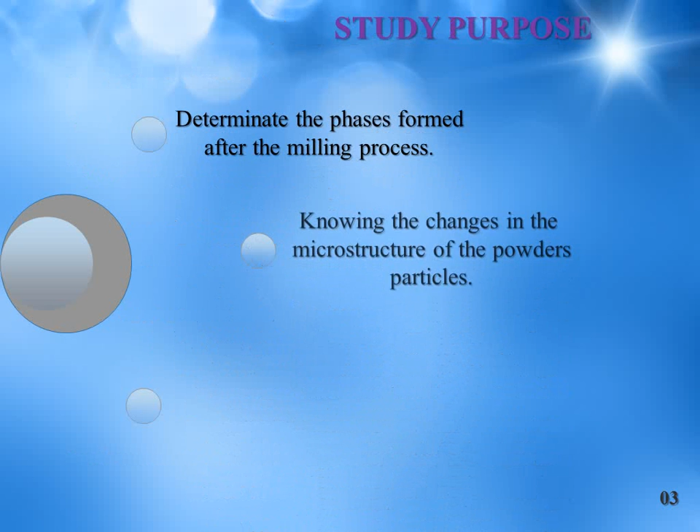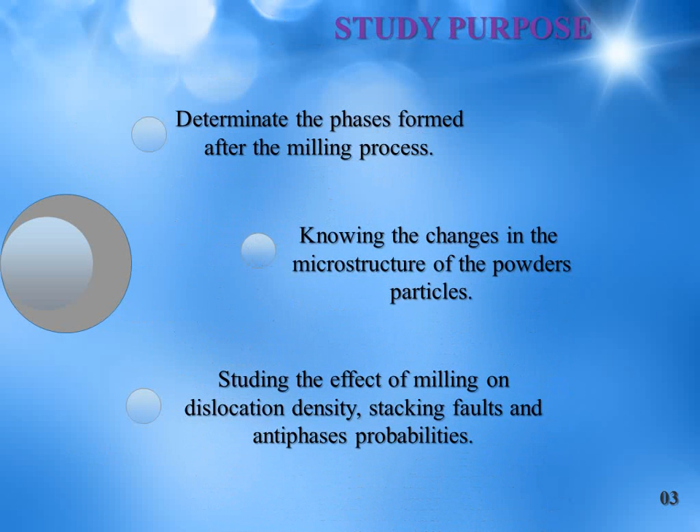The purpose of this study is determining the phases formed after the milling process, knowing the changes in the microstructure of powder particles, and studying the effect of milling on dislocation density, stacking faults, and anti-phase probabilities.

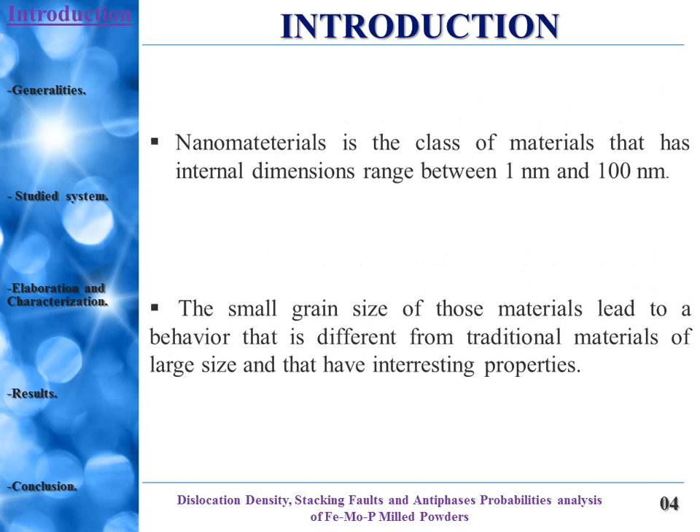Introduction. Nanomaterials are a class of materials that have internal dimensions ranging between 1 nanometer and 100 nanometers. The small grain size of these materials leads to a behavior different from traditional materials of large size, and they have interesting properties.

Classification of nanomaterials. Zero-dimensional nanostructures: this category includes all materials with a dimension of 100 nanometers in diameter.

Two-dimensional nanostructures: in this category, a scale of 2 dimensions of 100 nanometers is required. Nanotubes and nanowires, as well as nanofilms, are important models for this class of materials.

Three-dimensional nanomaterials present particles such as nanoparticles, metal powder, and ultrafine ceramic materials, called three-dimensional because their dimensions on all 3 axes are less than 100 nanometers.

Terms of nanomaterials: quantum dots, fullerene, nanoballs, nanoparticles, nanotubes, nanofibers, nanowires, nanocomposites.

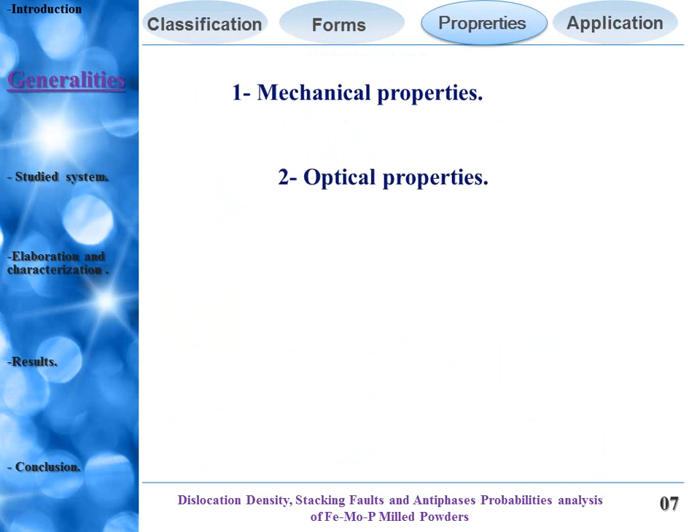Properties of nanomaterials: mechanical properties, optical properties, magnetic properties, electrical properties. Applications of nanomaterials: energy, transport, army, medicine, electronics, water treatment, space.

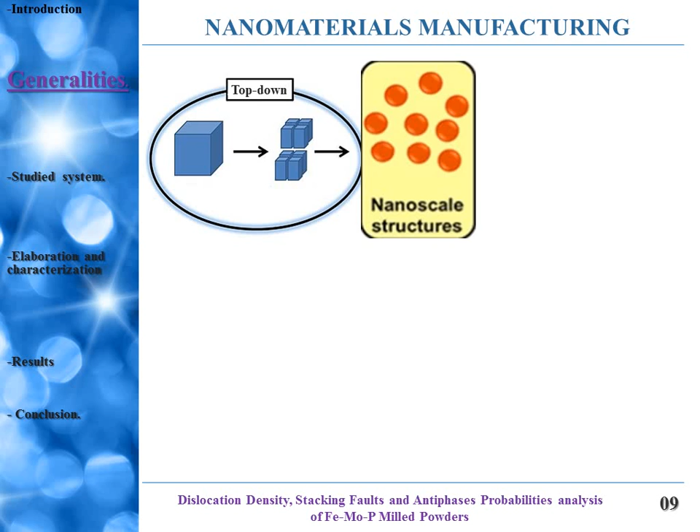Nanomaterial manufacturing. Top-down: in this way we use bulk materials in their natural state, beginning with the materials and reducing them to the nanoscale, such as reducing bulk materials to nanowires.

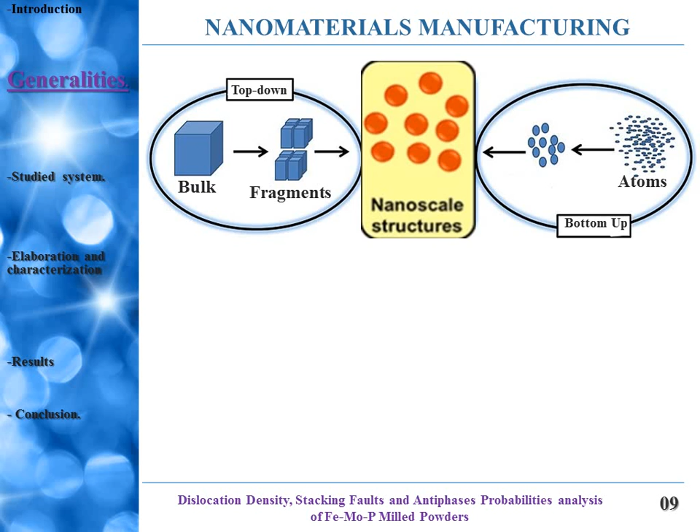Bottom-up: in this way we start from the atoms, which are then separated and assembled to reach the nanotechnology scale.

The methods used in top-down include milling, etching, laser contact method, and sputtering. The methods used in bottom-up include sol-gel, aerosol, and chemical vapor deposition.

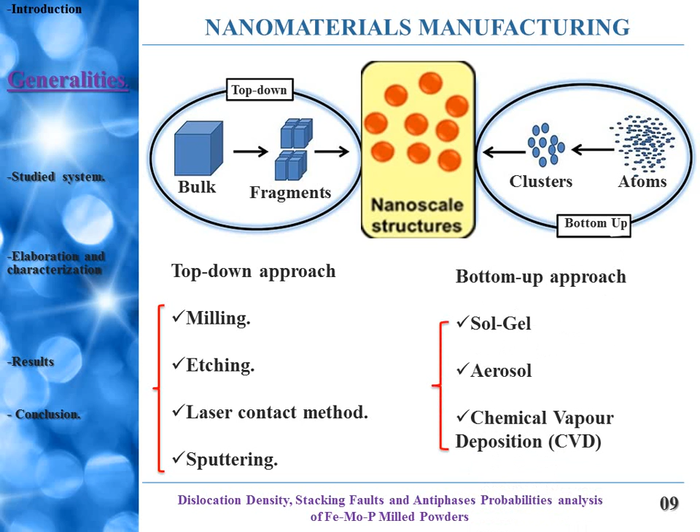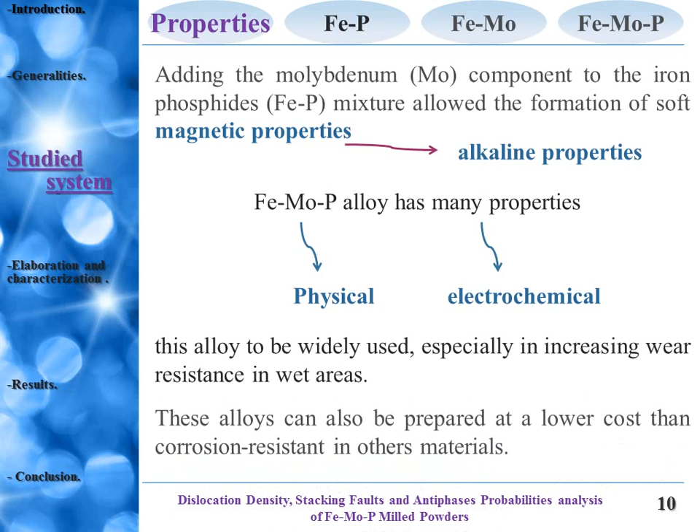Properties: adding the molybdenum component to the iron phosphide mixture allows the formation of soft magnetic properties and improves alkaline properties. Iron molybdenum phosphide alloy has many properties, physical and electrochemical. This alloy is widely used, especially for increasing wear resistance in wet areas, and can be prepared at lower cost than other corrosion-resistant materials.

Iron phosphorus binary complex system consists of 4 defined compounds: Fe3P, Fe2P, FeP, FeP4, and different transformations like eutectic and allotropic ones.

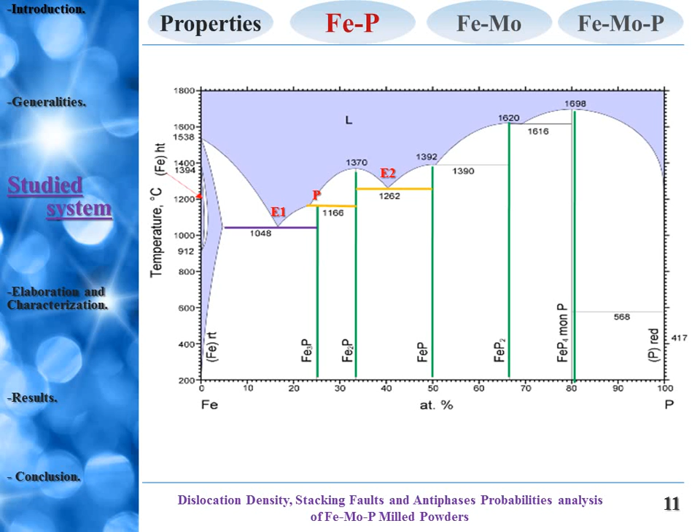Iron phosphorus binary complex system, where several transformations take place, as shown in this diagram: allotropic, eutectic, monotectoid, and peritectic transformations.

Thus, the iron molybdenum phosphor ternary system equilibrium diagram is complex too. It consists of 3 defined compounds formed by fusion: MoP, Fe3P, Fe2P, and there are 2 ferrites.

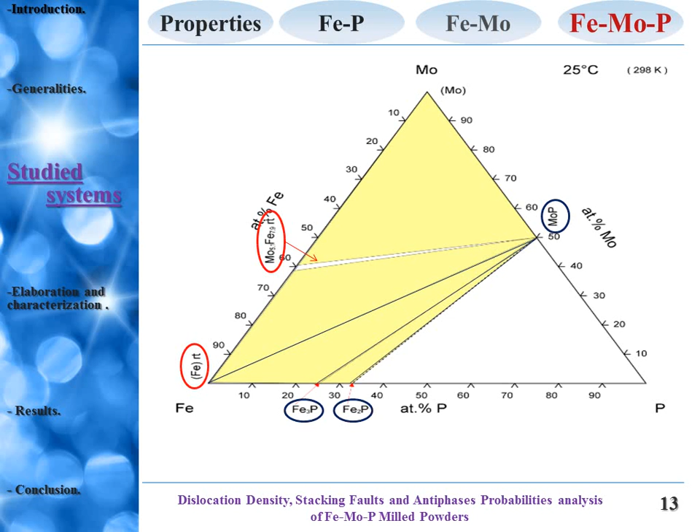Iron molybdenum phosphor samples were prepared by mixing small amounts of iron, phosphorus, and molybdenum powders. The samples were prepared inside a glove box in order to avoid the effects of oxygen contamination of the powders, under an argon atmosphere.

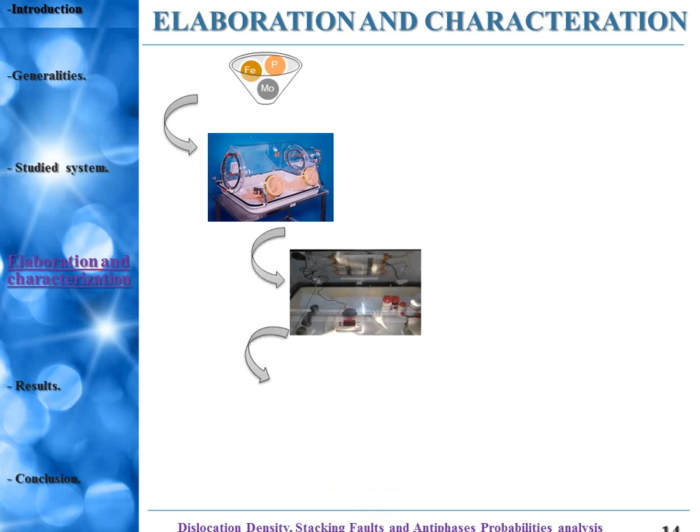Then the vials were placed inside a Retsch PM400 planetary mill for a high energy mechanical milling process. The milling speed reaches 350 rpm, stopping every hour for half an hour to avoid overheating inside the vials.

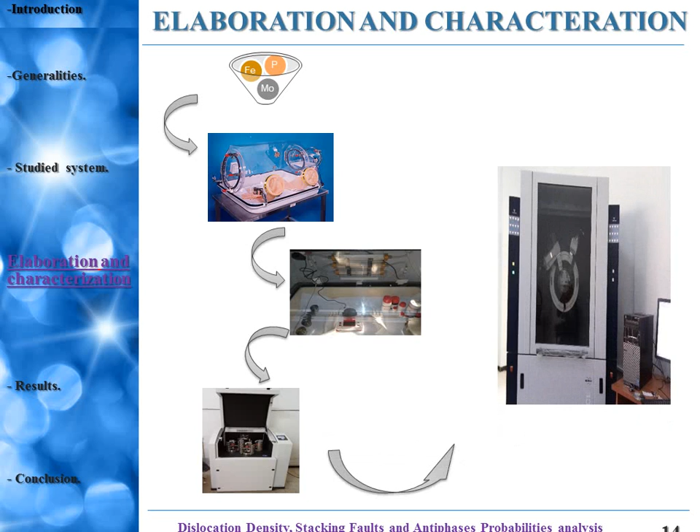To determine the new properties of the powders after milling, we used X-ray diffraction with a Bruker D8 type X-ray diffractometer, and simulation with a program based on the Rietveld theory.

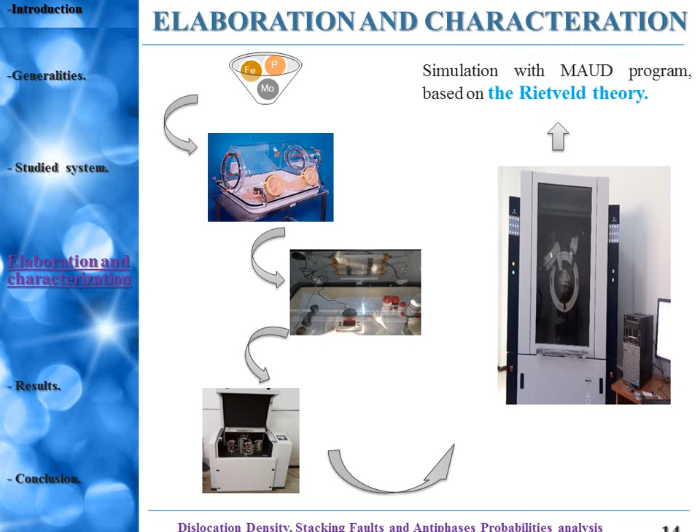The Rietveld theory is a theoretical method to analyze X-ray diffractograms, adjusting the profile of the experimental diffraction diagram using instrument parameters, structural and microstructural parameters. The Rietveld program minimizes, by an algorithm based on the least squares method, a function called the residue, with Yci equal to...

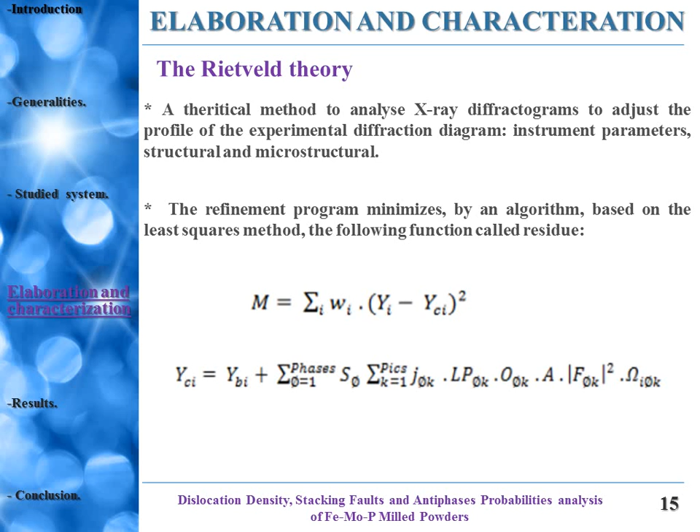We now turn to the results. Before the milling process, we note the existence of 2 different phases, which are the alpha solid solution and the molybdenum element, and the disappearance of the phosphorus element.

After an hour of mechanical milling, we observed the disappearance of the molybdenum compound and the emergence of the iron molybdenum phase, with the continued appearance of the alpha iron phosphorus solid solution. After 2 hours of mechanical milling, no new phases had formed, only the iron molybdenum phase and the solid solution.

After 3 hours of continuous mechanical milling of the mixture, no new phases appeared, but the arrangement differed from the 1 hour and 2 hour grindings.

The stable phases obtained from 1 to 3 hours of milling are iron molybdenum and the iron phosphorus solid solution, with different structural and microstructural parameters.

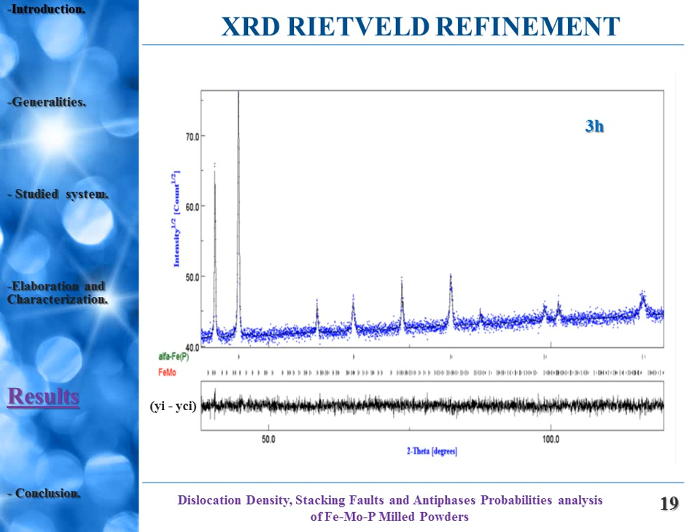After 1 hour of mechanical grinding, it was observed that the most intense peak of the solid solution descends a little, then rises again after 2 and 3 hours of grinding.

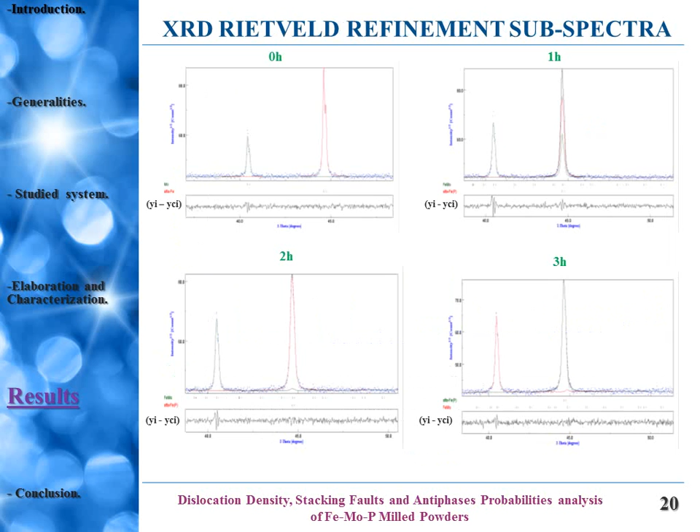After 3 hours of milling, the grain size decreases for the solid solution and remains nearly stable for the iron molybdenum phase.

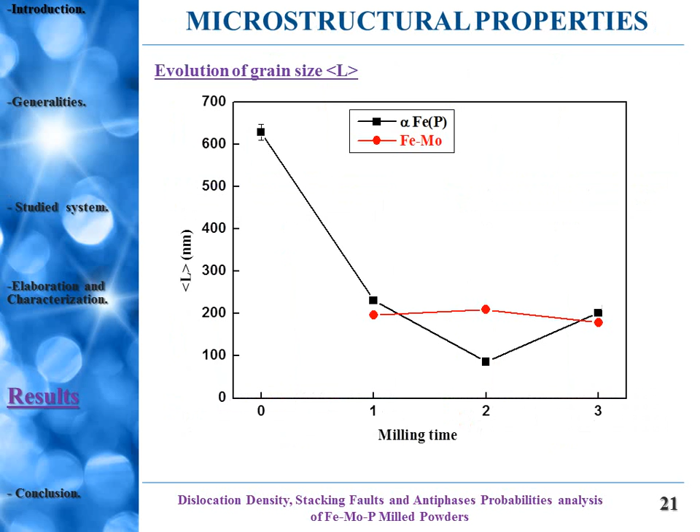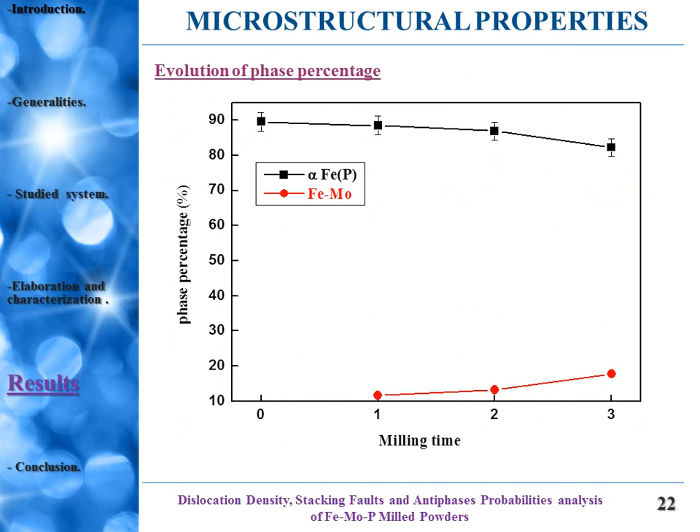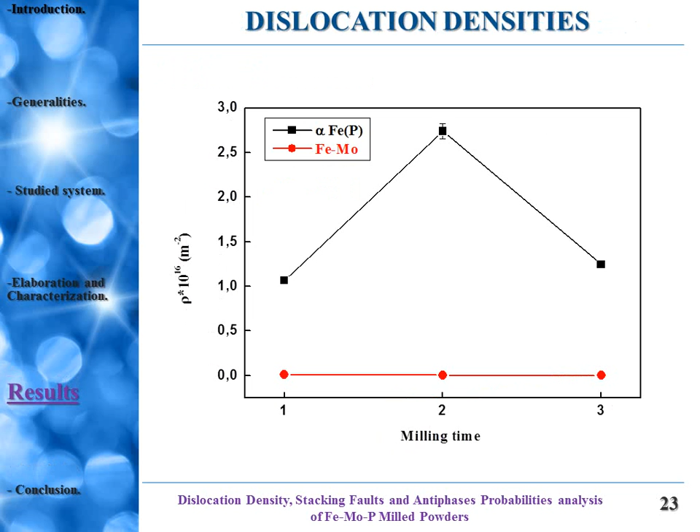During milling, it was observed that the proportion of the iron solid solution decreases slightly to the benefit of the iron molybdenum phase. A change in the dislocation rate is observed in the solid solution, which is the host, while it remains almost zero for the formed iron molybdenum phase.

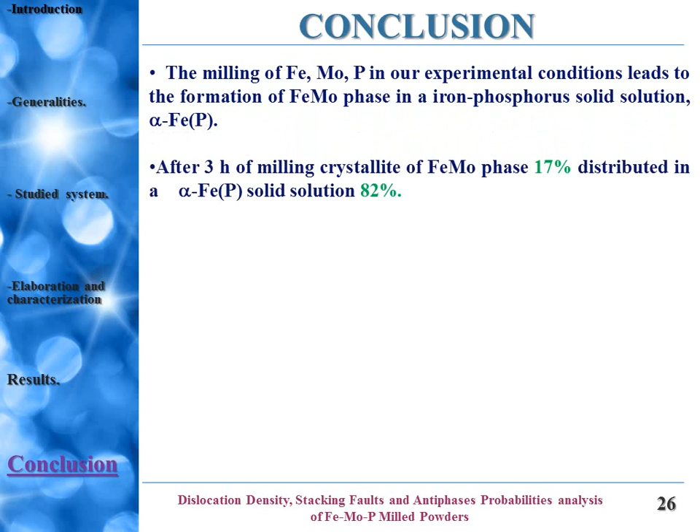Conclusion: milling of iron molybdenum phosphor under our experimental conditions leads to the formation of the iron molybdenum phase within the iron phosphorus solid solution. After 3 hours of milling, crystallites of the iron molybdenum phase are distributed as 17%, with the alpha iron phosphorus solid solution at 82%.

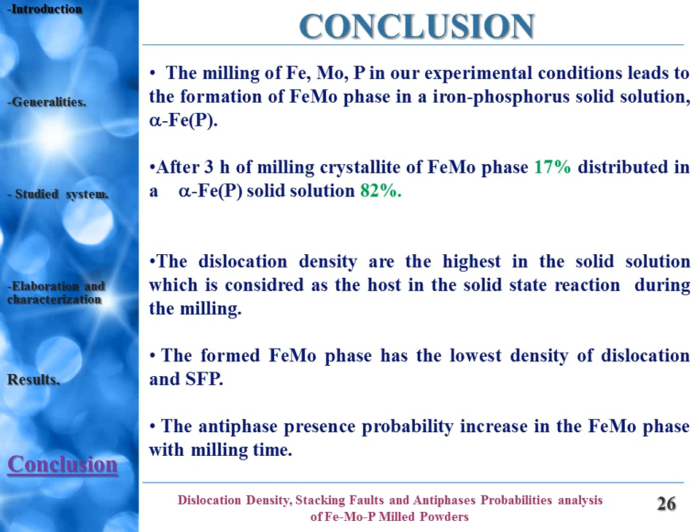The dislocation density is highest in the solid solution, which is considered the host in the solid state reaction during milling. The formed iron molybdenum phase has the lowest density of dislocations and SFP. The antiphase presence probability increases in the iron molybdenum phase with milling time.